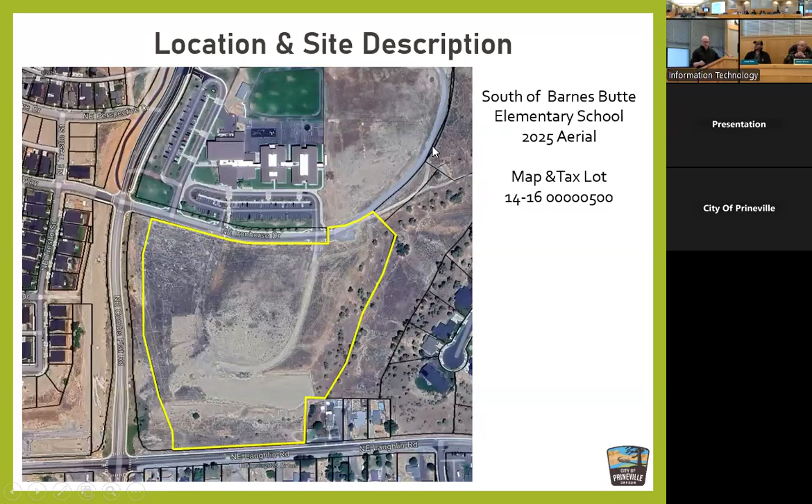If you move over, this is what it looks like today, where the school is. The Combs Flat Road canal was piped, and Combs Flat is a little further west, but this area was changed in 2013 to accommodate the school, which is when that loop road was envisioned.

Someone's trying to lock us out.

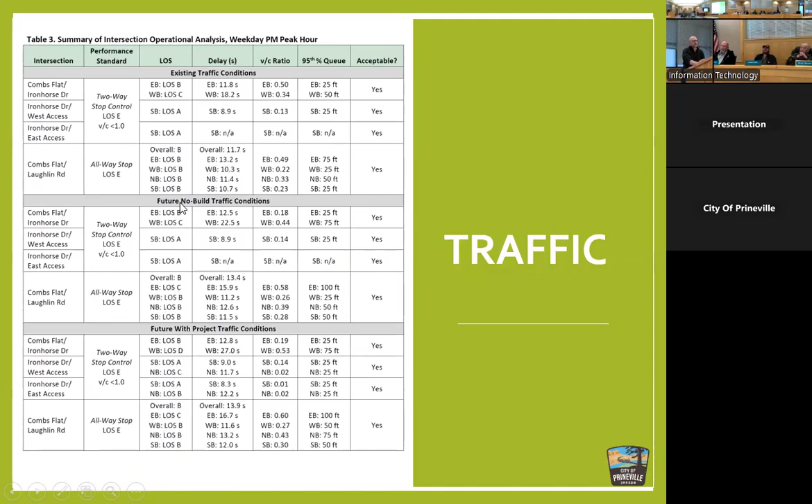The next development will stack on top of this study and so on and so forth. Hopefully we get those connections made, particularly not only Iron Horse Drive, but eventually Anglers, and those roads will connect to the south or to the east so they can go south onto Wayfinder. And that's how we're looking at the traffic so far.

We're also in conversations with Joel, the new superintendent of the school, to see if we can tweak some of the ways they actually do drop off and pick up, and some of this road circulation - if we can adjust different times, get their take on what we can possibly do before this road connects through. So there are other efforts we are having to do, because the primary problem is not anything that these developments are doing, it's the school and those pickup and drop off times. In the summer, it's gone. After, during the day, it's gone. At night, it's gone. So there's not much to fix other than that 15 minutes.

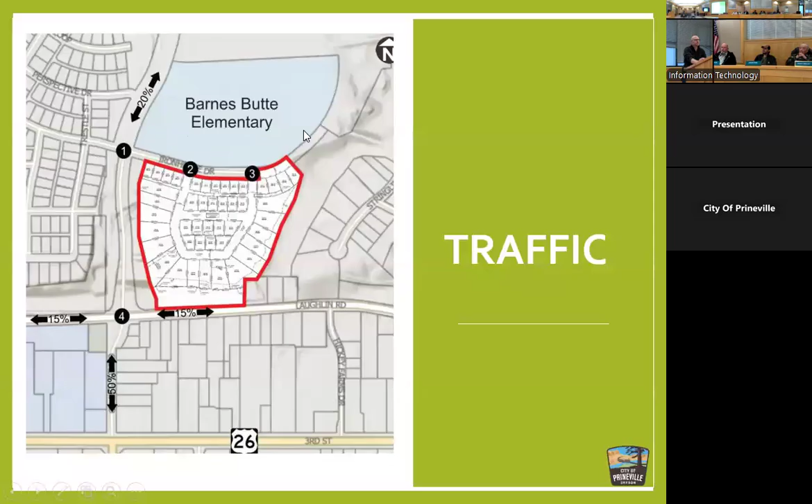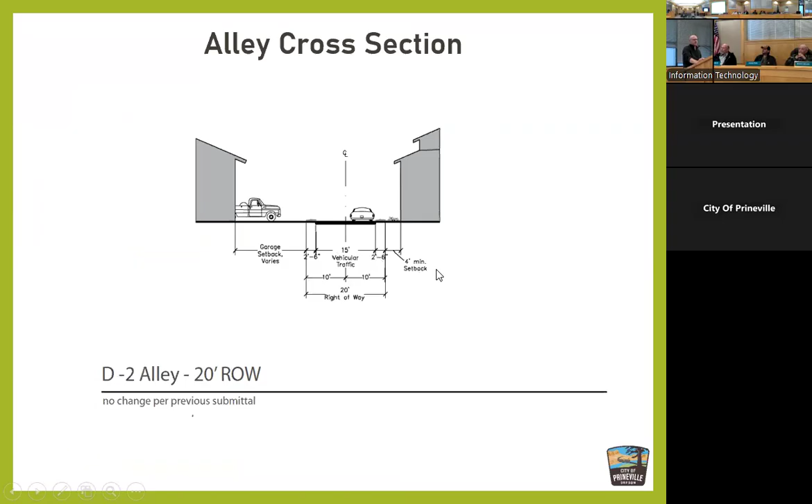Roads - like I said, alley cross sections, your typical city cross section, 20-foot of right of way, 15-foot traffic. This is straight out of the Iron Horse ODP, right off of their construction drawings, what they're building, same as they built over on the other side. So the alley is pretty typical. We're looking at 3 inches of pavement, not 2, but that's essentially the difference.

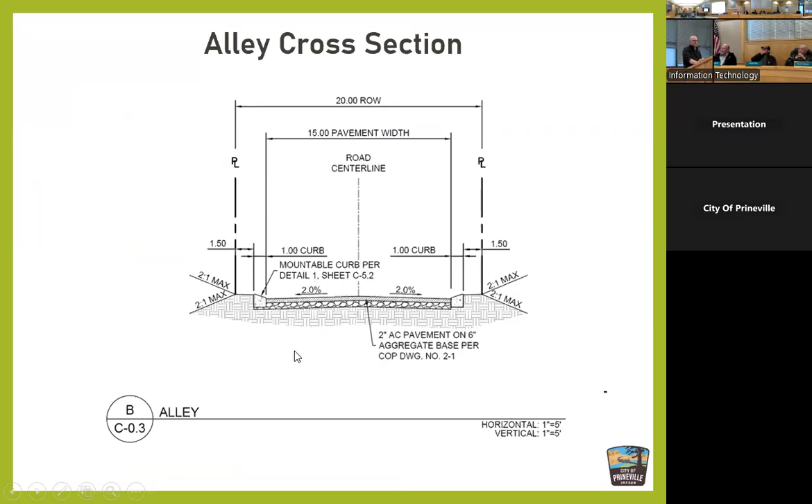ODP cross section - this is where we really did make a change. This is the original, or what was updated in 2013. It was supposed to be a 32-foot wide street, parking one side, 55-foot right of way, and 6-foot curb extensions. We have changed that. Actually, the developer, Brett Morgan, proposed this, and we in the city basically said yes please, we want these streets to be a little bit wider. So 36-foot of pavement, which is our standard, a 60-foot right of way that maintains the planter strip, and the sidewalk is the same as all of the rest of Iron Horse, but it gives us the full parking both sides for our street width, and the right of way allows it all to be accommodated within it.

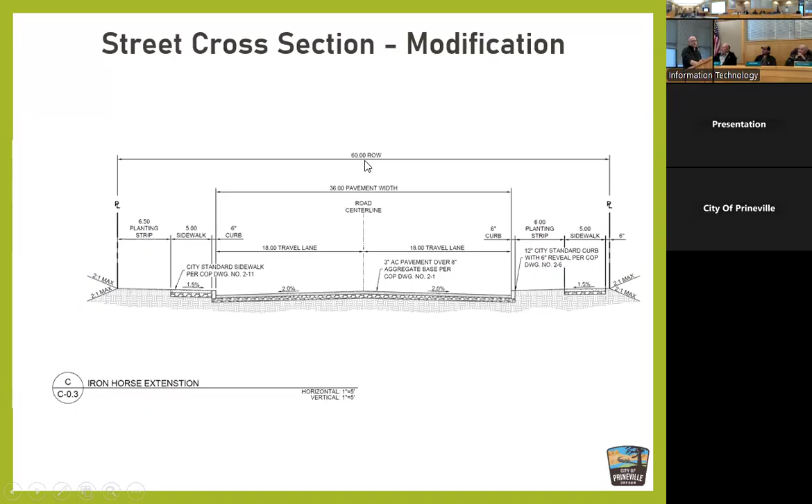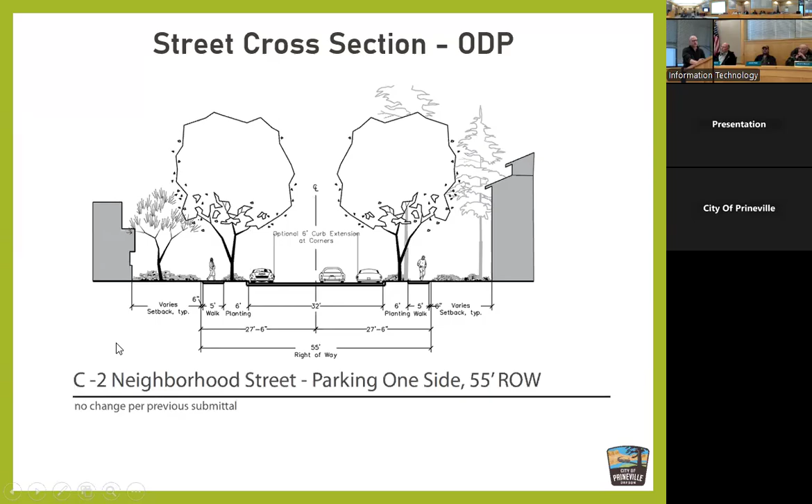And then we took those 6-foot curb extensions that were shown here and we dropped them to 4. Actually, I think what you're seeing out there now, some of the curb extensions that people complain about, those are 8-foot curb extensions - I don't know why they did 8. But the option was for 6 on these C2 neighborhood streets. We dropped them to 4 in the actual plan.

General findings show the plan meets the intent of the ODP. This is single family going to single family, with larger lots than probably where it was anticipated originally, smaller lots in the middle, larger on the outside. The subdivision will extend needed infrastructure through, like discussed with Iron Horse Drive.

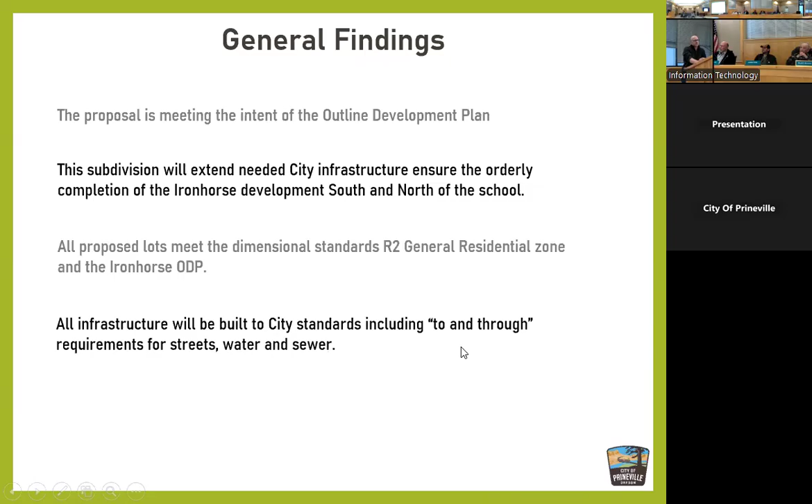Dimensional standards are being met, both the ODP and the city zone standards. The ODP would actually allow more density if he wanted, but he's trying to keep larger lots on the outside for himself and possibly sell the ones in the middle. All infrastructure will be built to city standards, including to and through water, sewer, and streets.

There are a couple of specific conditions unique to this place. The no build line was put upon them by the outline development plan to preserve that unique open space area. There's also a fence standard maintained by the HOA to have uniform fencing on the outside, consistent with the standard for the entire neighborhood, so it looks uniform just like the other side.

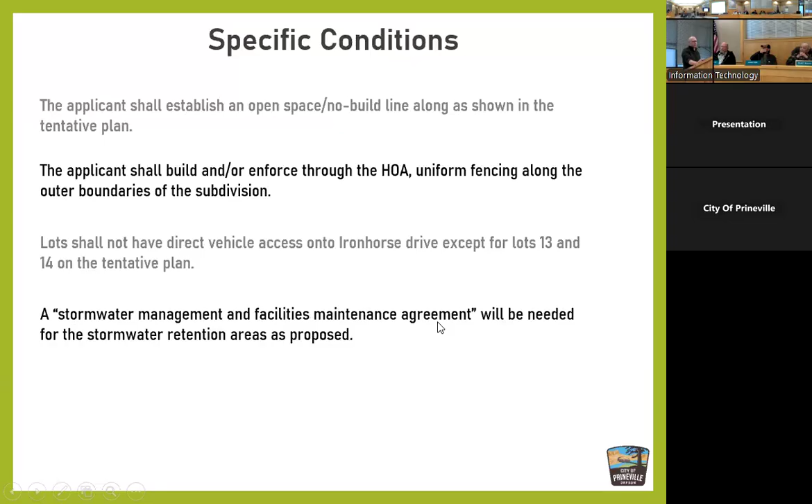Lots 13 and 14 are the only ones that can access Ironhorse Drive—that's the only exception. With the storm ponds as developed, we might need a maintenance agreement like we did with Polish. We have a template used for Polish homes to manage these areas, so the HOA will maintain them even though they're taking city street runoff. That way they get maintained and no one argues over who should be doing it.

So with that, I'll leave the tentative plan up here. We can have discussion, then go into questions and motion if needed. Does anybody have any questions from the commission at this time?

On lot 13 and 14, why not just continue the alley? Was something limiting that? It drops off—if you look at the aerial, this lot here, the hillside just drops. You could maybe get lot 13, but I doubt it. It'll take whoever wants to develop that; if they feel they can build lot 13 up and get alley access, fine, but 14 is probably not going to happen.

On lot 39, there's an easement line and a no build line at the back—how much does that limit development? This easement doesn't really limit it much, it's just to access this lot. This lot also falls, so there's kind of a bench right here, and they'll share a driveway.

So these guys don't actually have their own driveway in the corner—they'll use this to get through, and it'll be shared. The rest of them are all good. This lot doesn't drop; there's a bench right here that drops off, and it just requires it. We worked with this for quite some time to get that to work.

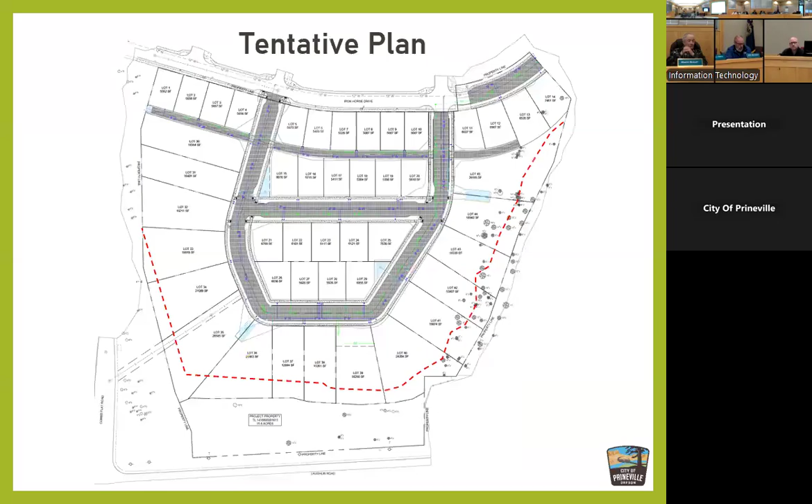I would make a motion in favor. Here we go, here's the language right there. Make a motion in favor of the staff report. The record of tonight's proceedings are hereby incorporated as findings of fact in favor of this application. I move that the application be approved, subject to the conditions of approval as they have been finalized and based upon the findings of fact in favor of the application.

We have a motion in favor. Do we have a second? I'll second. We have a second. Those in favor? Aye. Aye. Opposed? None noted, so.

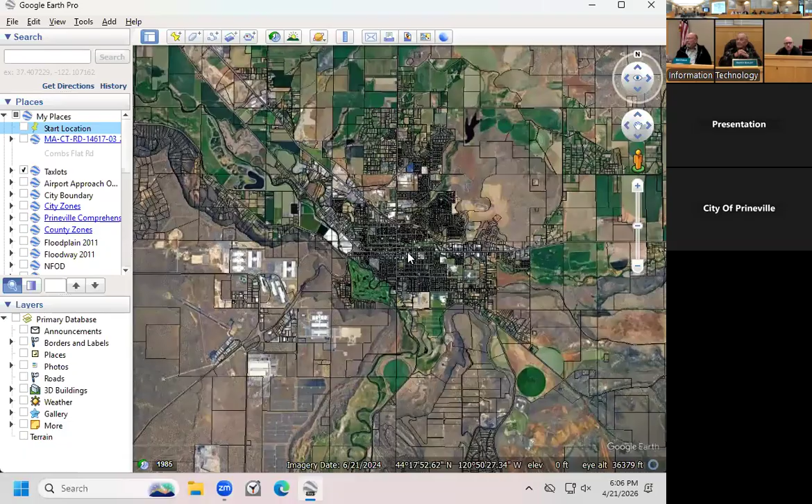Okay, how about an update on developments and city projects? So we have some water line projects going on around the Fairmont area. You've probably seen those happen up in here.

Just replacing some of our really old water lines. Actually, we did have another wooden one that we had to get rid of - didn't know it was there.

So that's happening, and the South Main paving is going to happen. You've probably already seen Facebook posts and some advertising of that to get people to understand there's going to be a moment. We're going to try to fit it in before fair.

They're working on it for Rodeo - yeah, it's going. So that's happening. Those are our two major infrastructure projects for development. Development wise, the one you just heard tonight, right in here.

The other one I expect to come in this year is the Rooted Homes project in this area. This was originally supposed to be an extension of the Iron Horse Lodge. They decided not to build their second building, and instead Rooted Homes bought the project. It's going to be, I think, 24 duplex style homes like you see on Laughlin, but with full garages and such, with an access alley here. So I do expect that one to come through this year.

Something interesting came up today I thought I'd bring up with you guys is the Hudspeth House. This thing has a residential zone with an outline development plan over the top of it saying it's private open space because it was originally going to be used for a community center. It then has deed restrictions placed on it from Brooks Resources that sold it, and it's never been able to get off the ground. Someone is going to buy it, it sounds like.

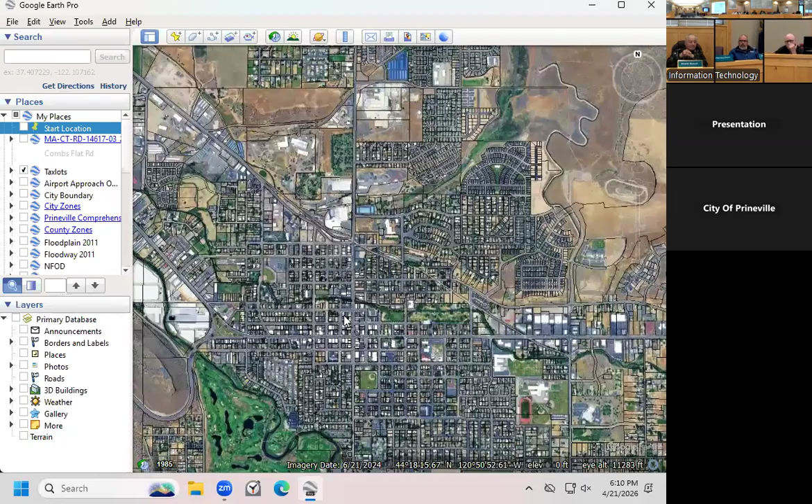Other than that, have you ever gone down to the new Cadillacs? Gone to that grand opening—that was a nice new place, kind of brightens up the downtown.

We're getting the streetlights put in. The old ones have already been taken out, and that really makes a difference when you pull those lights out and take the wires down. So the new lights will be going in, and they'll repair the sidewalks pretty quick. I expect the little place here at the edge to open this summer, if not this spring, because they're about done—they're advertising for their trucks and things, so I'm expecting that one to open pretty soon.

The road is paved coming out to Combs Flat from the apartment complex. If we get into the apartment complexes, these guys are gonna be opening two buildings in May—the northernmost building and the easternmost.

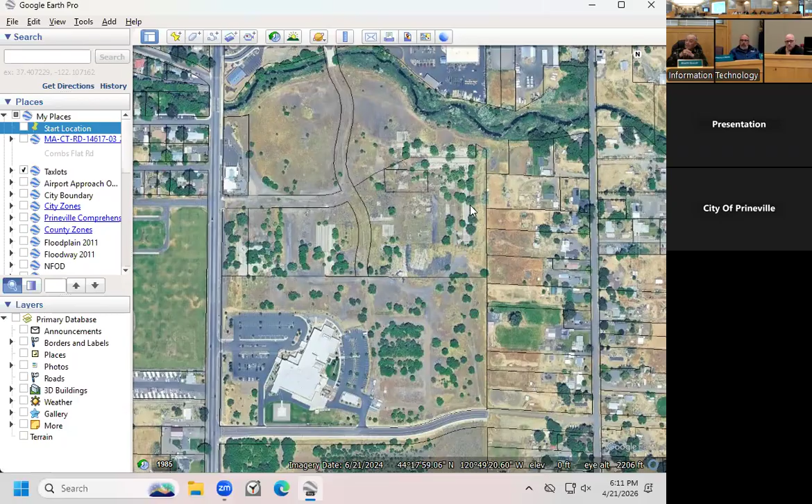Let me turn this on. That building and this building will be opening around May-ish. They paved these streets—I think they left part of this only two inches, and they're going to finish it because they want to use it for construction traffic while they finish out the rest of the project. They'll open buildings as they go and start renting them out. We're expecting that to go.

And if they fill up quickly, then phase two, which is over here, they'll kick that off probably immediately, as long as they know the demand is there.

Madras Highway is slower, but you can see they have three buildings up now—I think this one, this one, and there's a fourth one going up now. They also have the garages, the two along the backside, the two separate ones right there. They're much further down the road—I think they've got several months before they could even, because their parking lot isn't even shaping up.

But they're moving forward, and getting moving in the Laughlin homes—these are almost complete. I think they've already sold a couple, as they finish out the last few.

Other than that, our stuff up on the hill—CVI is almost done. That large building here at the end, that manufacturing company, they needed to be open by June. So it looks like they're going to hit their mark.

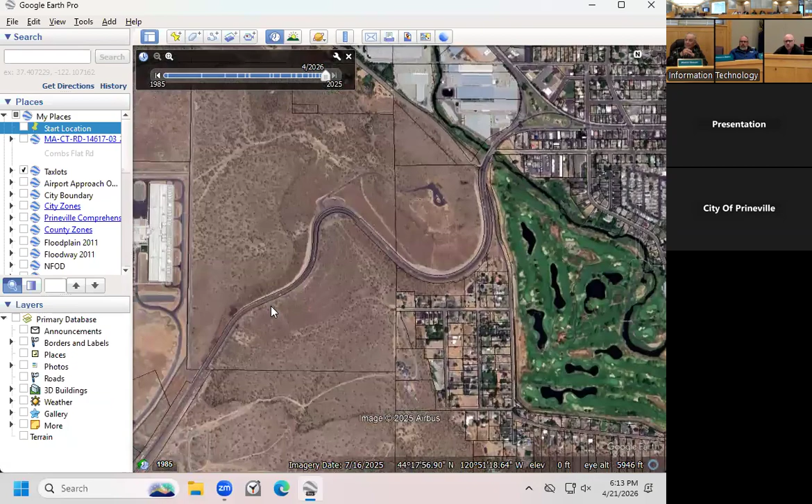So the last one—you can see the hydro seeding redid this runway here, and then rebuilt all the RPZs there. I don't know what the next project is, unless it's to lengthen this one. I'll have to ask him.

But there's these openings with the FAA, Federal Aviation, that open up and we apply. We are looking at a new master plan—I thought I saw where it had been approved. It may have been, I haven't heard; Kelly hasn't been to our management meeting, so I haven't heard. But I know he was looking at the grant, and we were also looking at doing a master plan, which they usually pay for as well. So that might be what they're doing, is just updating the master plan. But we'll see.

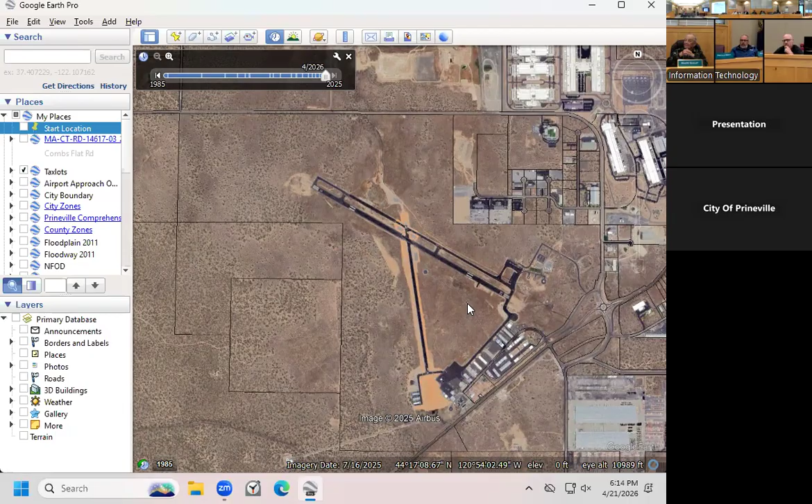Let's see, next meeting is May 19th. Right now I don't have any public hearing items that have come in, but we've got lots of time. There's a potential for that Rooted Homes project and another Iron Horse project, if those are ready to go. We'll see where they're at.